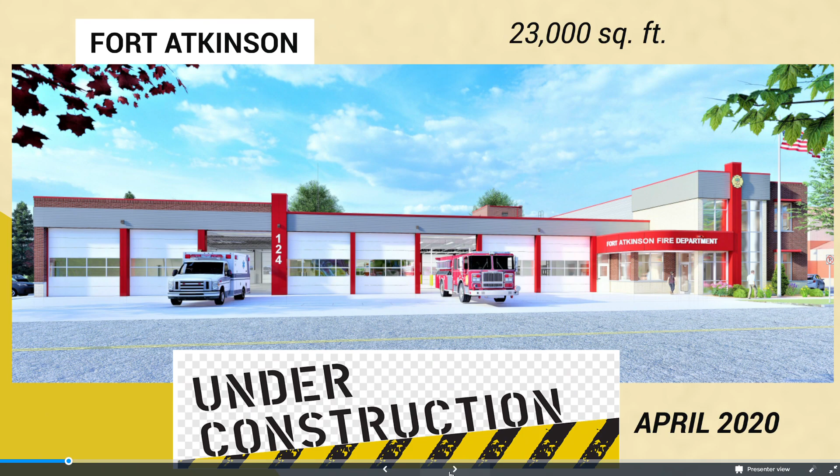A couple projects we've done when you're looking at fire and EMS stations - not every company is building them every single day, but to go over a brief summary of a few stations we're involved with or have completed in the past. City of Fort Atkinson, that is currently under construction, started in April of 2020. It's about a 23,000 square foot fire and EMS facility with some full-time and volunteer.

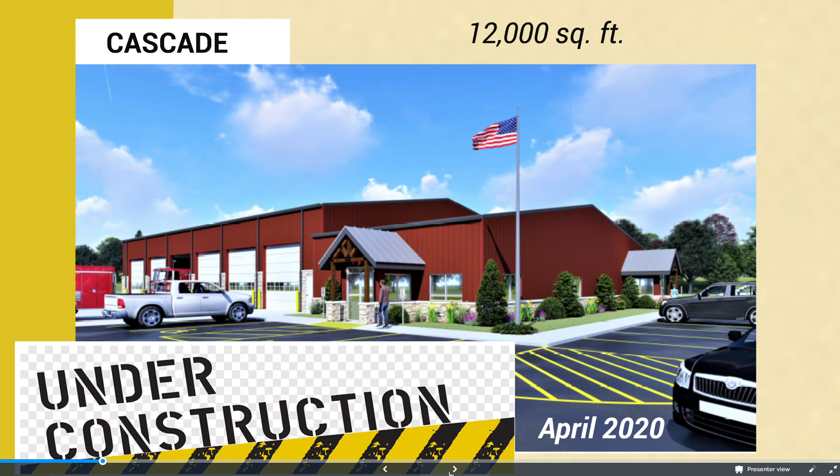Iron Ridge was recently completed, I think a couple years ago. That is a 12,000 square foot volunteer fire station only. Cascade, 12,000 again, fire station only for volunteer. That is currently under construction, broke ground in April of this year.

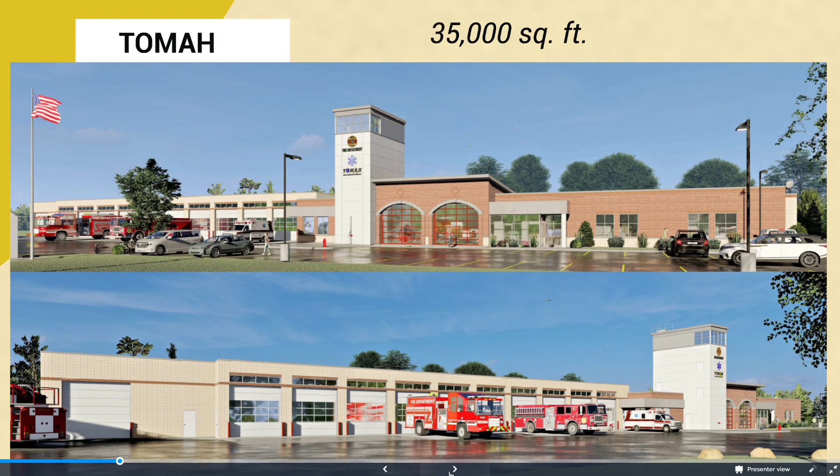The City of Tomah, this is full-time fire and full-time EMS station, about 35,000 square feet. That is currently in the design phase. Bailey's Harbor up in the Door County area, currently under construction. That broke ground in April of this year, about 15,000 square feet, fire only.

The Brussels Union Gardner, known as Bug Fire and EMS Facility - this is station number 1, 18,000 square feet. That was completed, I believe, 2 years ago, as well as a small expansion and remodel out of the Bug station number 2. And another project currently under construction this year, broke ground in June, 15,000 square foot fire and EMS station in the town of Freedom.

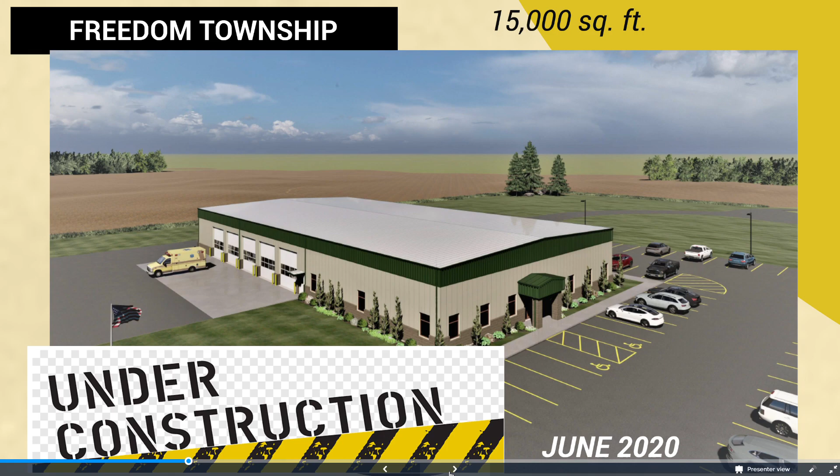So let's talk about your project. Currently, the fire and EMS station is here with the white roof. You can see the cursor over it. This is the apparatus bay where all the trucks are, and then we go into the office, meeting area, and bathrooms with the EMS apparatus bay over here.

In recent past, Cambridge Fire and EMS acquired this parcel with an existing building and a house behind it. The intent of this parcel is to utilize it for a future addition.

So in order to find out more about the project, myself and the licensed Keller Architects sat down with the building committee for the Cambridge Fire EMS to go through their needs. So this is an interview process. It takes a multitude of meetings, a lot of research, and dives into every single room in the facility and every single current need, as well as looking at future needs.

Before we get into that, every project that I'm a part of always starts with a project goal. So the project goal for this project was: how can we create a solution to solve the problem of our current aging facility in the most economical manner? Really, we want to use the idea of the most bang for our buck.

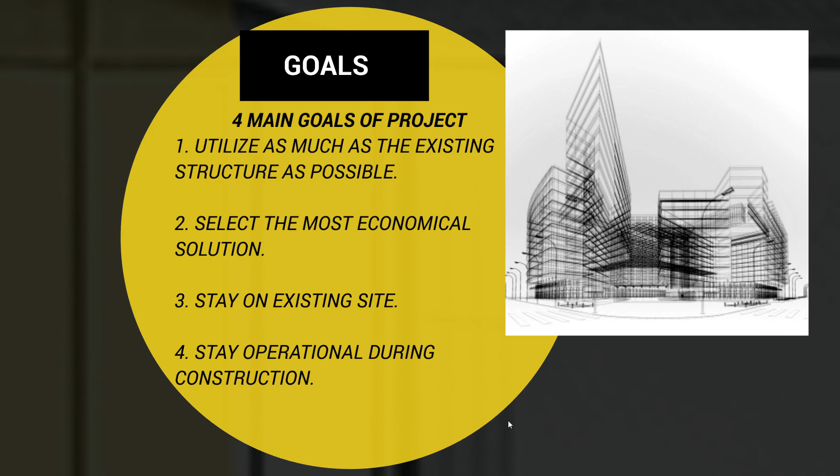These are some challenges if you just picked one, but selecting all of these really puts the design to the test.

So that is a little bit about the project, about the concerns and problems we're facing. Now let's look at the architecture. We're going to go through a quick fly through with a 3D animation, and then go over some general preliminary design that the architect came up with.

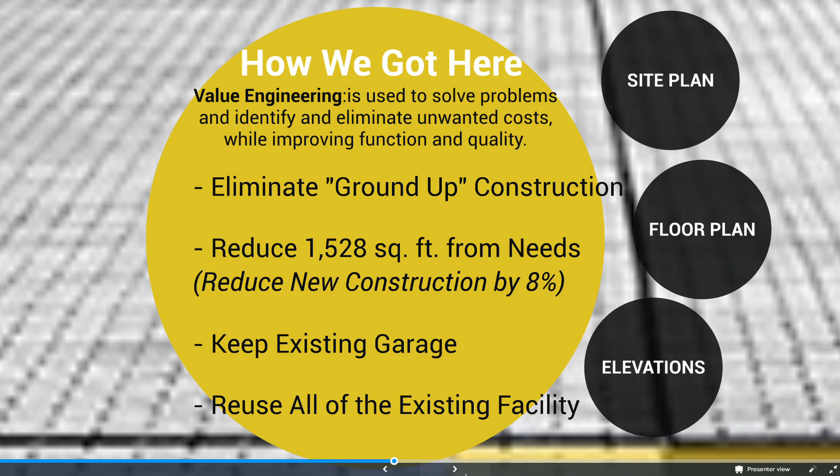Site plan, going over the phasing aspect. So this part, as we mentioned, is the apparatus bay. The proposed addition would be primarily apparatus bay, so the existing apparatus bay would vacate into the proposed addition, as well as the EMS.

So what would be left is the office space. In the existing apparatus area, there would be offices and a training room built, along with a small day room. So the proposed addition would be phase 1, and the office space would be phase 2.

And then the existing office space would vacate into the other apparatus bay, and then phase 3 would be constructing the dormitories and a couple other spaces that are non-critical for fire and EMS.

The existing building is approximately here, and the other house is approximately here. So the entry would narrow, as well as the other entry, and we would add an entry for the apparatus that would be a direct access, with additional parking both in the front and back.

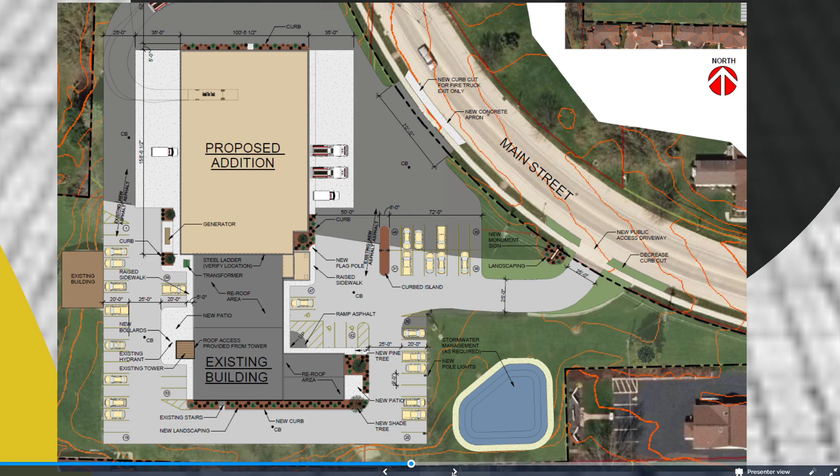So this is the office area. If you follow my cursor, this is the existing apparatus bay. As we mentioned, office space would be moved in, as well as a training room, and these would be the critical items for operation.

So this would be phase 2, which would then leave phase 3 for the dormitories. Mechanical space would obviously need to be done during phase 2, and then the day room as well.

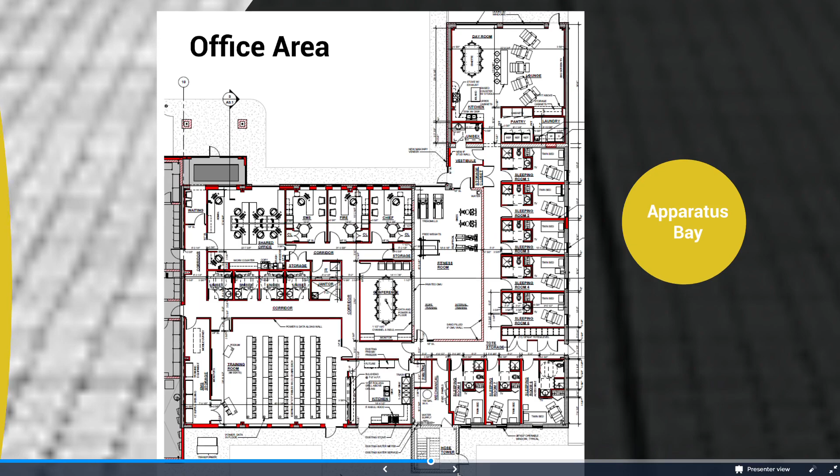The existing hose tower would remain, and in the proposed addition of the apparatus bay, we've got apparatus for fire and EMS, a separate room for turnout gear for fire and EMS, with some wash decon rooms and storage rooms with a mezzanine on top.

We'll briefly go over construction management. I don't want to spend too much time on it. So what it is, is a process where the construction manager will actually bid out each division of work, really creating an opportunity for a lower overall cost.

It's completely transparent, it's all public bid, and it really increases the opportunity for local contractors. Keller would not actually self-perform. We would be at risk, meaning that we would take all the liability for the project until completion.

So, say for instance, similar to back in 2008, if your excavator went bankrupt and you never heard from them again, Keller would be responsible to find a solution. There are a couple different solutions, but ultimately none of the communities would be liable. Keller would figure this out on their own.

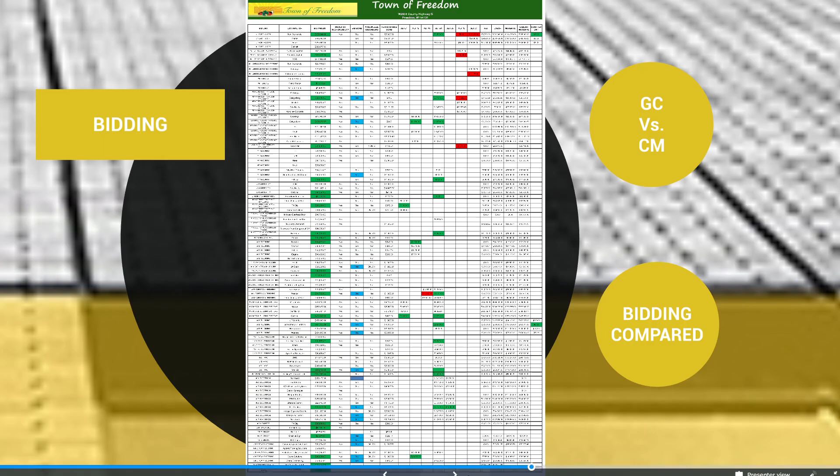So I'll zoom in to get a better look at this example, but this will hopefully help give a perspective on the process. So we bid out each division. We have 4 earthwork bids, 3 asphalt bids ranging from 101 to 117,000, 3 landscaping bids, 3 fencing bids, 5 exterior concrete bids ranging from 59,000 to 90,000. So it really creates the opportunity for local contractors and getting the most competitive pricing rather than going to just a general contractor.

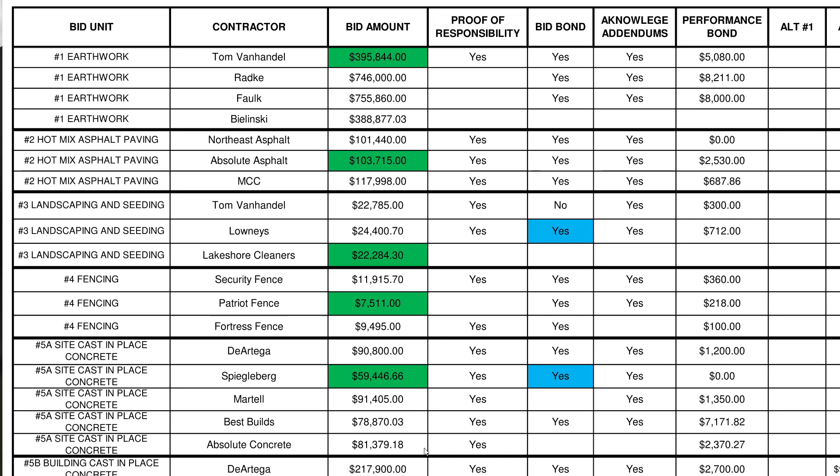We're going to skip over this. Budgeting. We'll briefly go over it. There is an in-depth budgeting process that we go through. So early on in the conceptual phase, in the needs assessment phase, very early on, we look at industry averages, comparable projects. So we were looking at approximately 5.5 to 7.5 million.

Overall timeline. Back in 2016 to 2018, the Fire and EMS Commission researched, they went on tours, they evaluated sites, they really started digging into their options. 2019 to 2020 was analyzing the needs, preliminary architectural design, and preliminary budgeting. 2020, where we're currently at, is informational meetings, media, community engagement, which this presentation would be considered, and really the main focus is educating the public on the project, the process, and the next steps looking forward.